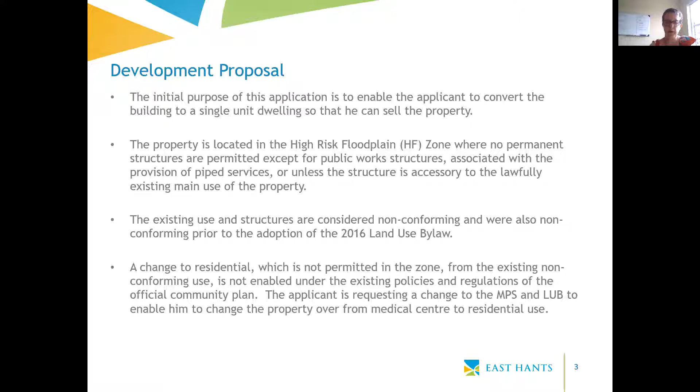The policy change will affect all properties in the high-risk floodplain zone. It won't just affect the applicant's property, it will affect all the properties identified in that high-risk floodplain zone. There are high-risk floodplain zone properties in Shubenacadie and all the way up along the Shubenacadie River, all the way up to Enfield.

The Municipal Government Act sets out that the municipal planning strategy can allow for the change in use of a non-conforming use of land or a non-conforming use in the structure to another non-conforming use. Currently our municipal planning strategy doesn't allow for that to happen.

In this zone, regulations to limit development in a high-risk floodplain are intended to protect property owners, but also to enable the lands to function as an area where flood waters can flow freely, which helps protect other areas from flooding. Once the land use or buildings are no longer in operation, there's an opportunity to remove the existing use and potentially the building from the area. This does, however, have an impact on existing property owners and creates a potential hardship for these people.

The non-conforming uses in a high-risk floodplain zone are different to other zones with non-conforming uses, as there's no opportunity to use the building for any other use, as all buildings and uses of buildings are prohibited unless it's for public work structures related to the provision of pipe services. This isn't the case in other zones where you have a non-conforming use. If you needed to change to a different use in that other zone, there are other uses you could fall back on, but in the high-risk floodplain zone, there isn't that opportunity.

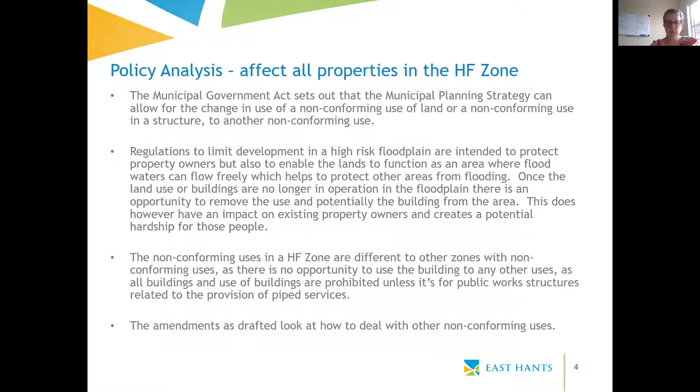The amendments are drafted. They look at how to deal with other non-conforming uses as well, not just changing to residential. As I mentioned, there are a number of properties in the high-risk floodplain zone throughout along the Shubenacadie River which are currently not in residential uses, and we counted 22 of those properties. The draft amendments will enable these properties to change to residential use as they are non-site specific.

So there is an opportunity to consider other amendments regarding other non-conforming uses. And these amendments are also relevant to other properties with existing buildings in the high-risk floodplain zone. So amendments are proposed that...

The first part is a non-conforming use be permitted to change to a non-conforming single unit residential as of right. The permits will still be required. So any existing basements will not be permitted to be used for habitable space.

So what this means is that if these amendments that are proposed go through, if anyone has an existing non-conforming use in the high-risk floodplain zone, they could, if the amendments are in place, come in and apply for a permit to change over to a residential use.

So for other non-conforming uses in the high-risk floodplain zone, this could be considered by development agreement. This would say that the existing non-conforming use shall not have been discontinued for a continuous period of 2 years. So they have to establish that the use has been on that property within the last 2 years.

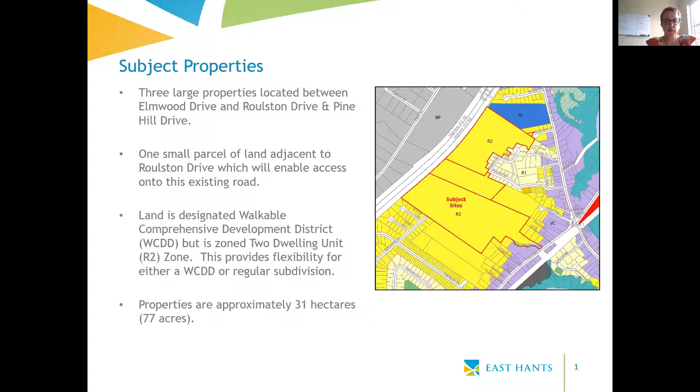R2 is single and two unit dwellings, so it allows for either semis, duplexes, or single units. The properties are approximately 31 hectares in size. A walkable comprehensive development district allows for a mixture of housing types, parks, open space conservation areas, and utility uses. Roads will link Elmwood Drive through to Roulston Drive, Beech Street, and Pine Hill Drive. The proposed street network could be done now through the subdivision process, which I just briefly mentioned. A traffic impact study has been completed and is being reviewed by the Provincial Transportation Department.

There's a table here that shows some of the numbers of units being proposed. We have 121 of the 34-foot frontage single family dwellings, and 39 with 40-foot frontage, for a single family total of 160. Then we have 75 semi-detached, 12 townhouses, and 2 multi-unit residential areas with a total of 304 units, giving a total of 662 units for the development.

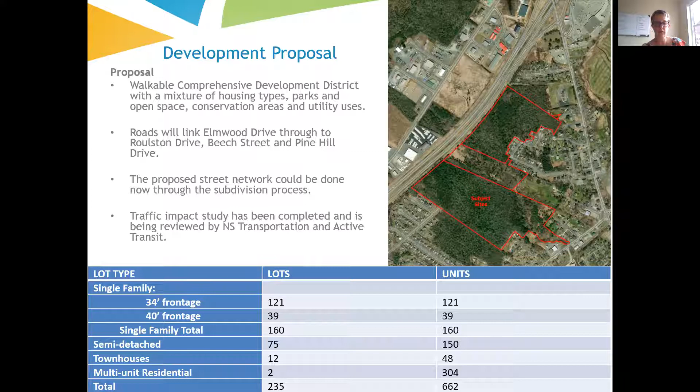So here's the site plan. We have the road, as I mentioned, with Elmwood Drive linking through to Roulston Drive, and some linking into Beech Street on this side and this side. This side of the development is the 40-foot frontage single family dwellings, and then we have the 34-foot frontage single family dwellings all the way around here. We also have semi-detached dwellings proposed in the purple area, and townhouses to the back which will back onto the 102.

These two areas, this one here and this one down the bottom, are multi-unit buildings, all 4-story multi-unit buildings. You can see there's a dashed line just here. This shows a non-disturbance area, which covers this area back here.

There's also a non-disturbance area here, which will provide some buffering for the multi-unit buildings to any adjacent properties. We have proposed right now 2 open space or parkland areas, one here and one here. Just a note though that the municipality is reviewing, as part of the whole review package, the open spaces and parklands that are proposed. So we don't know at this point whether there will be any changes, or through the negotiation process what that might look like, but that's what we have right now.

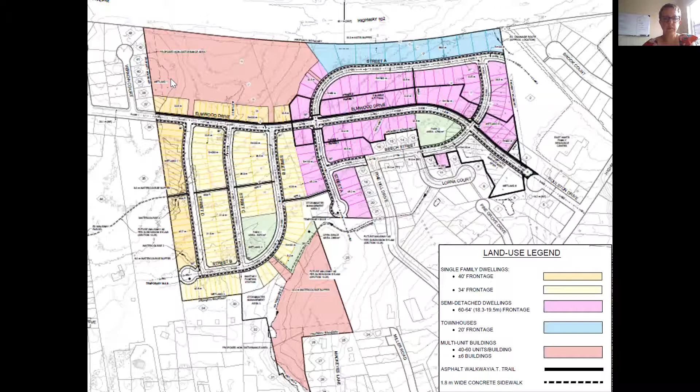So these are the multi-unit residential concept plans. If I go back to my previous screen, I can show you where these 4 are located, up in this corner here. So we have these 4 multi-unit residential buildings, and as I said, they are 4 stories in height. We have 4 buildings with a total number of units of 216 units.

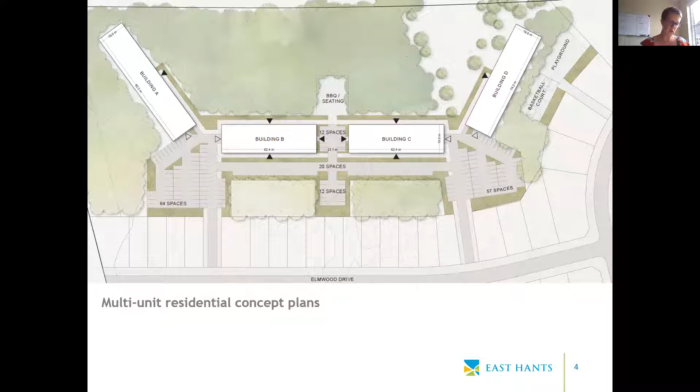These 2 buildings here, I'm just going to go back to this plan. This is down here at this end of the development. And this one, there's 2 buildings, 4 stories, and a total number of 88 dwelling units.

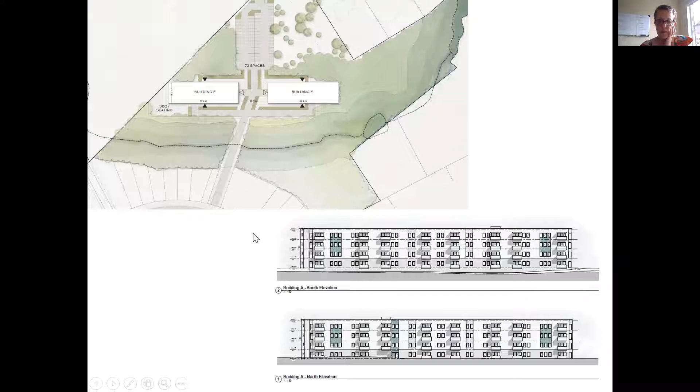You can see here just some elevation drawings of some designs that the applicant has submitted for the elevations for those multi-unit buildings.

Council has designated the land as Walkable Comprehensive Development District in the municipal planning strategy, and this designation enables the zoning to remain in place until such a time as landowners come forward with a proposal to enable the WCDD through a development agreement. WCDD stands for Walkable Comprehensive Development District. The designation expresses council's willingness to encourage this type of development, and within each of those WCDD sites will be the ability to implement a variety of land uses, including residential, comprised of varying densities, and institutional, open space, and commercial uses. No commercial uses are being proposed as part of this development.

This enables the developer to provide a variety of housing types which meets the need of the wider community. The street network as proposed could happen now through the subdivision process, but that's also subject to the requirements of the Nova Scotia Transportation Active Transit being met.

The proposal includes a sidewalk plus an active transportation trail, which would not be required under the subdivision bylaw. The sidewalk is required under the subdivision bylaw, but the active transportation trail is over and above the subdivision bylaw requirements.

Issues which will be considered and reviewed include, but are not limited to, the adequacy of central water and wastewater systems to support the development, adequacy of existing and proposed active transportation and automobile transportation networks, adequacy of recreation and community facilities, and the linking of the proposed development with Roulston Drive, which is a gravel road owned by the province, stormwater management, and traffic.

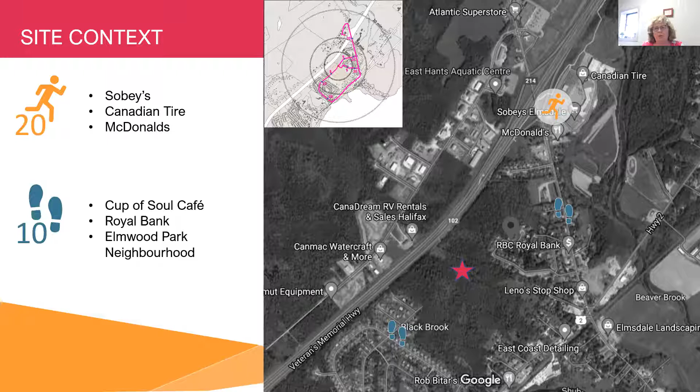The staff team's done a good job of giving you an overview, so we're not going to repeat all of that. I do think it's important to note that this site is zoned R2, which allows singles and 2 units, and could be developed now without going through any kind of public process.

What is exciting though about this site is that it has this walkable comprehensive development district, which requires infrastructure and an approach that promotes walkability and a focus on active transportation. This is a real opportunity for the community and for this project, as Rachel called it, to move it in the direction of a more sustainable, walkable, human scale development, rather than a regular subdivision.

This zoning also allows by site plan 4plexes, convenience stores, and live-work uses. All of those things would allow an estimated approximate 440 units to go in there without going through a development agreement.

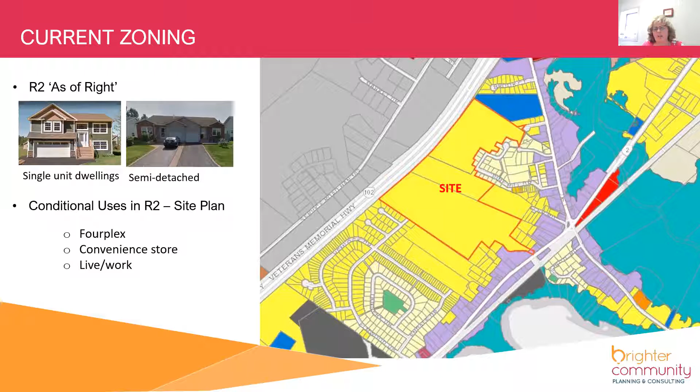It's a site that has the opportunity to connect through from the 214 and connect different neighborhoods that already exist. So the development agreement is really focused on a walkable, comprehensive development district. It's about making it a place where people can move around without having to use cars necessarily.

It promotes a variety of land uses and a variety of densities. So all that means is that you can have a variety of different housing forms, from single unit dwellings to duplexes to townhouses to apartment buildings. The intention is to have that variety of density.

It also makes sure that the roads can make logical connections. We've all been in those subdivisions where you get in and you can't figure out how to get out. The proposed road links are intended to make more sense and be human scale, and in this case it's more grid-like, with really good infrastructure for pedestrians and bikes, so that you feel comfortable with your kid riding a bike down the street that has that infrastructure.

A comfortable streetscape simply means it's a place that's pleasant to be on. So the design of the streets and the buildings makes you want to be there, as opposed to making you not want to be there.

Also to promote the efficient use of municipal infrastructure. When you have pipes and roads, you want to make sure that you're using them for all they're worth, and that they're very expensive to install and maintain for the municipality. So using your infrastructure to its fullest ability is something every municipality must consider and does consider. And so the Walkable Comprehensive Development District has that intention behind it.

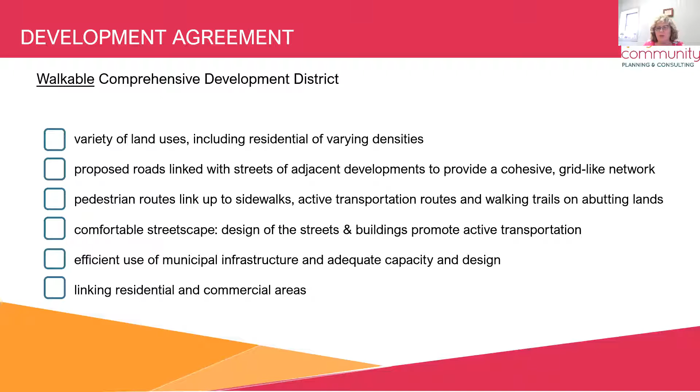And then linking residential and commercial areas. You want to make sure that people have a place to walk and bike to. Can they get to the commercial area, or your emerging village core, in a way that is easy and safe?

So the street layout is absolutely critical to this plan, and it's fundamental to making this fit with those WCDD policies - the walkable, comprehensive walkable development district. It's hard to say, comprehensive walkable development district.

And again, Rachel did a good job of explaining this. There's this spine that goes through the development, where you're going to have the infrastructure that really promotes the biking and the walking. And then you have the variety of other streets.

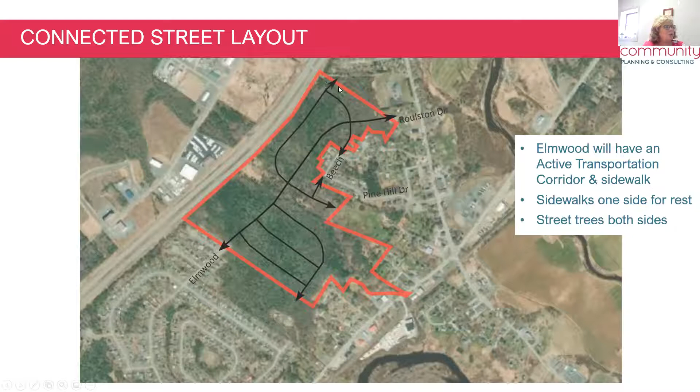These are the connection points down to Beech and Pine Hill, over to Elmwood and down to Roulston. This obviously doesn't link out to a road, but this is municipal land where we understand that there might be something happening at some point in the future. So again, the linkage isn't necessarily about roads, it's linking you to places where you need to get to. And the road would stop here, but it links you to this space, which is a public space.

So these are the road standards that were referred to earlier. This is the multi-use pathway, for biking and walking and strollering and rolling of any sort. It's 3-meter asphalt multi-use. For those of you who bike, it's very exciting to see the separation, so that oftentimes you see bike lanes sharing the same space as roads. This, however, is not, which increases safety and comfort.

And so there's street trees and a distance between the travel path for the cars. And then there's another street tree buffer area between the sidewalk. So this is what is being proposed to really fulfill that need to be a walkable, bikeable area, and also make it comfortable for people to be on the street through that main spine that we talked about.

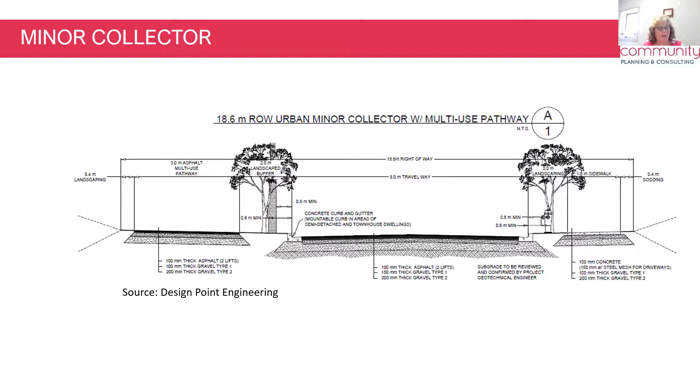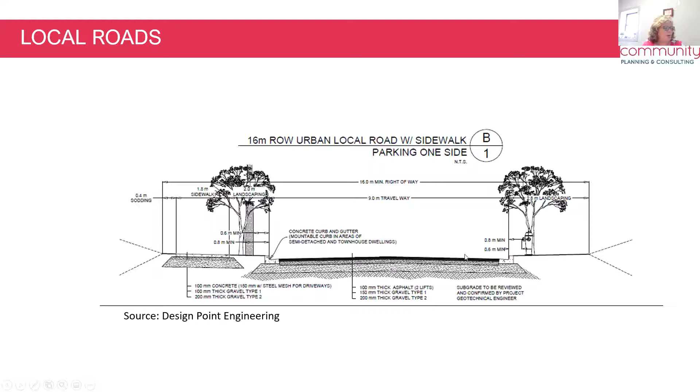The Roulston extension - the other streets do not have that, but do have a sidewalk on one side, the street trees, and then the travel path for the vehicles. So that's the proposal at this point. There has been a detailed traffic study which the municipality is reviewing, and we look forward to the comments.

There's a few interesting things about this. There's the two main accesses, so that's Roulston and Elmwood. And there's secondary accesses down through this area, which really aren't intended to be major access through to the site. There will be some traffic upgrades that are anticipated.

The other interesting thing about traffic is that whatever your new interchange is called - I forget what it's called right now - will relieve some of the traffic that's already on here. This was considered as part of the traffic study, and this development sort of offsets it.

Whenever the new interchange goes in, any traffic reductions that are anticipated as a result of that will be offset by the development of this. And then at Elmwood, at full build out, the traffic study does consider upgrades that will happen.

I know there's maybe some concern that this will be a shortcutting route. Traffic calming measures, I think, will be a discussion point. Those are under the control of the municipality to figure out how they do that. Different municipalities can do traffic calming in different ways. If that ends up being the case, we're certainly aware of that and open to discussions about how the municipality would like to deal with those.

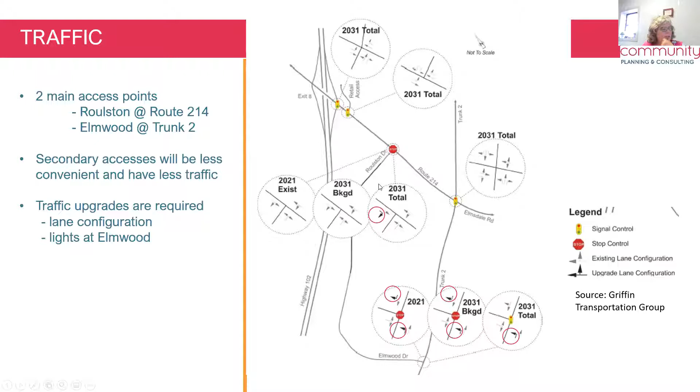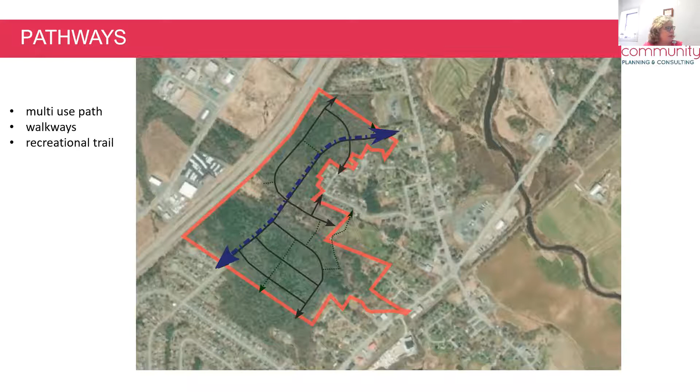And the parks are important in that walkability factor. As discussed, there's two main parks. The intention also with our multi-sites, which I'll show you in just a moment, is to have significant green space around them and buffered areas to ensure there's a smooth transition between densities.

The intention of the parks is for them to be within a reasonable walking distance for people to enjoy. We'll continue to work with the municipality to understand exactly how they see these parks being used, whether there'll be playgrounds, passive recreation areas, seating, or whatever the municipality determines is appropriate. That will come as we move through the development agreement stage.

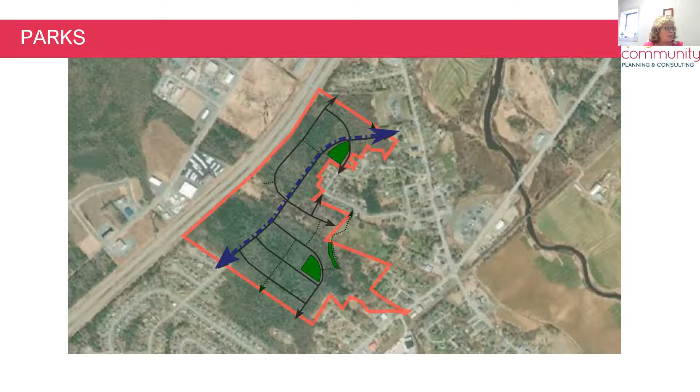So this is the different types of usage, and these are color coded. If you're looking on your screen, hopefully this is showing up for you. The yellow are the 40-foot frontages, and they're around the edge to provide a good transition into the existing development. Internal to the subdivision is 34-foot wide frontage. These are all single unit dwellings, the same development form that's here, just a continuation with minor variations in the frontage.

The two red areas are the multi-unit sites. These are the duplex or semis, and there's an example of what that looks like—semis on 18-meter frontages, compliant with what's in your land use bylaw, so there's no change from what's already there. Then these are townhouses, which would be up in this area, fronting on this street with a buffer to the back between them and the highway.

And you can see how the trail system, the parks, the streets, and the spine all work together.

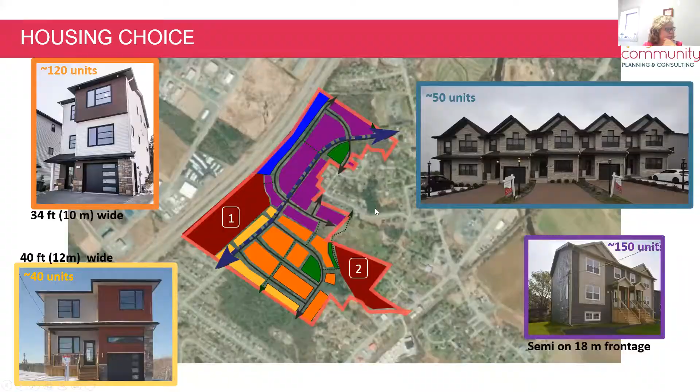So you've had a look at the multi-sites already. Just a couple more things I'd like to point out. The intention is to have some of the parking underground, so there's minimal surface parking—it's about half and half. The intention is to have a lot of green space around that, which helps with stormwater management, livability, providing recreational land, attractiveness, all those sorts of things.

There's a very large buffer between this green area and the lots in front of it. There's going to be some amenity or recreational space for the residents on site—a playground, some sort of sports court, maybe a barbecue seating area. The buildings were purposely placed so that you don't look into your neighbors' building. It's all designed to provide space that people want to live in.

And I saw a question—there is a 20-meter buffer between the lots on Vernon. The intention is to provide a buffer, and development agreements often have requirements about lighting not being shone on adjacent properties, those sorts of things. So buffering is an important consideration.

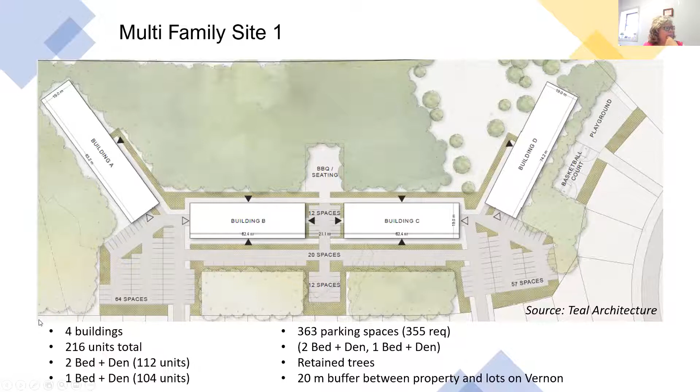The other multifamily site has 88 units. There's probably going to be a little bit of an adjustment here as we go through, just because we're a little tight to the lines here. Again, there's some underground parking in this location, and there needs to be a water course buffer. There needs to be links to the recreation trails, and again, we're trying to minimize surface parking.

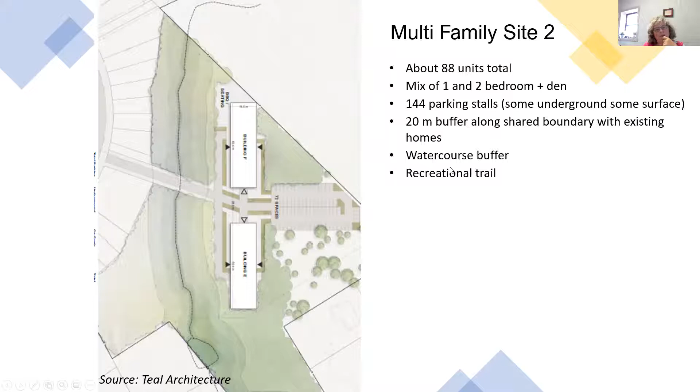These are the buffer areas we were talking about, outlined in green. The 10 meters here is between the developments and the highway, but between the new development and existing development, you can see it's 20 meters. And this is a water course buffer.

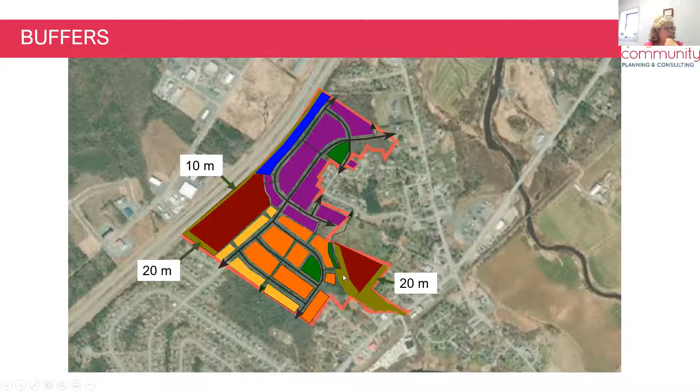So I'd like to turn it over to Andrew to talk a little bit about stormwater management.

Sure thing. So we did a bit of a storm plan up as part of the application. The thick blue line is the existing water course where the majority of the site drains to today. That includes some culverts that bring water from the highway, from Highway 2, to the site.

We also have 3 stormwater ponds planned. Those are the light green circles. I think those will be like an open pond, not very deep, that detains some water. The purpose of those is to match the pre-development flows, which is a requirement of NSE, Department of Environment, and the municipality as well.

We met with one of the staff from East Hants on site, and we understand there's been some flooding more or less at the intersection of Pine Hill and Beach Street. So what we're considering is the dark green line shown, which is a trunk storm sewer to help improve that drainage at that intersection. We need to work out a few more details, but that's what we're hoping to do, because really what happens there is a low point that captures quite a bit of water.

The other part of this is, by default, the upper roads like the Elmwood Drive extension above that flooded area will be able to redirect some stormwater away from that flooding area anyways.

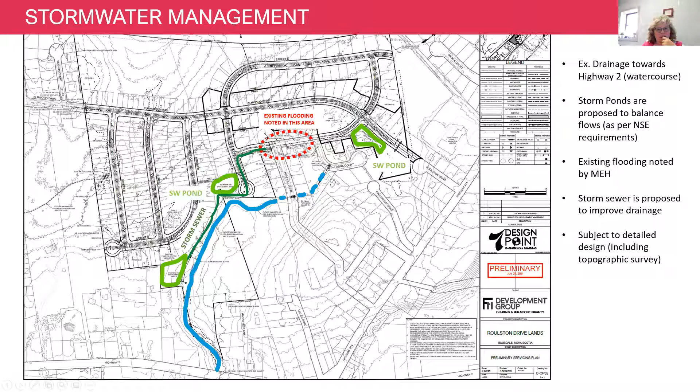And this is a site plan, the overall plan for the area. So we've walked you through it, and Rachel did the same thing. There will be a connection from Roulston to Elmwood coming through, trying to have a seamless transition between what's already existing and matching that, allowing more density internal to the site, and then coming back out here to Roulston.

Upgrades for transportation, we're still working on that - what's required, what's needed, what the impacts will be - but we think we have a pretty good handle on that.

Having good parks, really promoting and supporting the direction set out by the municipal planning strategy in East Hants to build on this notion of walkable communities, which for a variety of reasons is desirable and often builds the type of community where people want to live. So cars aren't screaming through, and people feel comfortable on the streets, and their children feel comfortable on the streets. Also having a variety of housing forms, from multis to townhouses to duplexes to singles to smaller lot singles, so there's a variety of price points, making it accessible to people at different stages in their life and of different economic means.

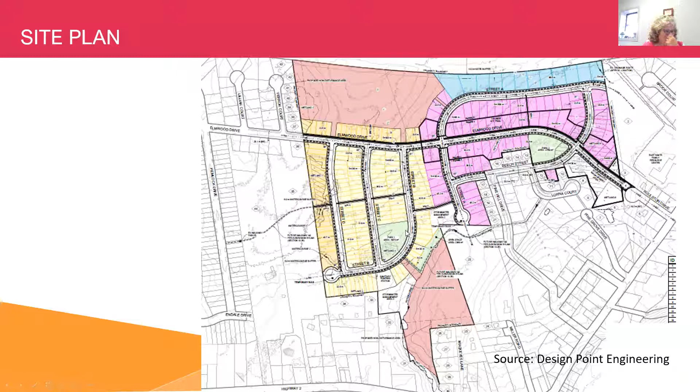Again, the trails and the parkland connected all together. So I think that's probably everything at this point, and happy to answer any questions.